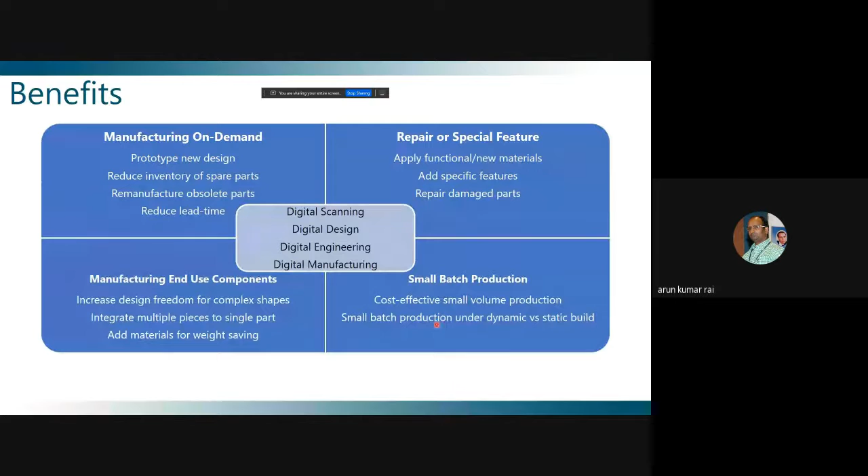Manufacturing end use component means if somebody wants a certain design, can you design it? In conventional manufacturing, it's difficult to do that for a small scale, but here this can be easily done. Similarly, small batch production is easier with additive manufacturing than conventional. So these are basically the benefits of additive manufacturing.

However, it has a lot of challenges still, which I will be telling you later - what are the challenges with additive manufacturing and how it can be rectified and improved upon.

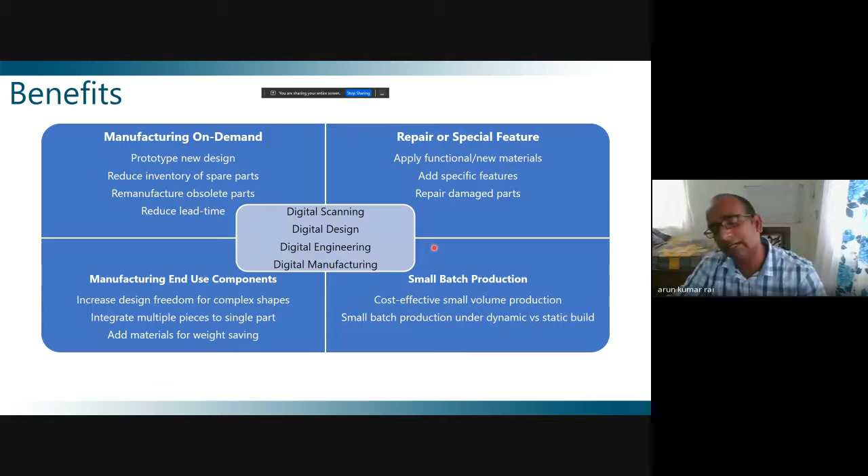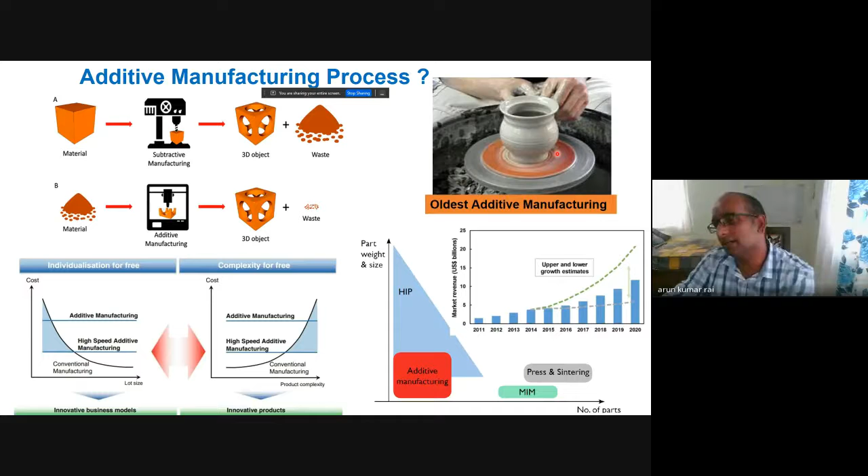Now there are various methods used in additive manufacturing. Going back a minute, here in the corner, you can see this is the oldest additive manufacturing technology used in India, like a pot maker making a pot using clay. This is basically one of the additive manufacturing methods - he made the green body, then sintered it, and then got the final product. So this is what is desired.

Similarly, the next process is called material jetting. In material jetting, instead of using a separate support material, the build material and support material are coaxially fed and then printed, and by using UV light it is cured and made into solid form. This way also you can print the 3D part, but this is again limited to low melting materials like some polymers.

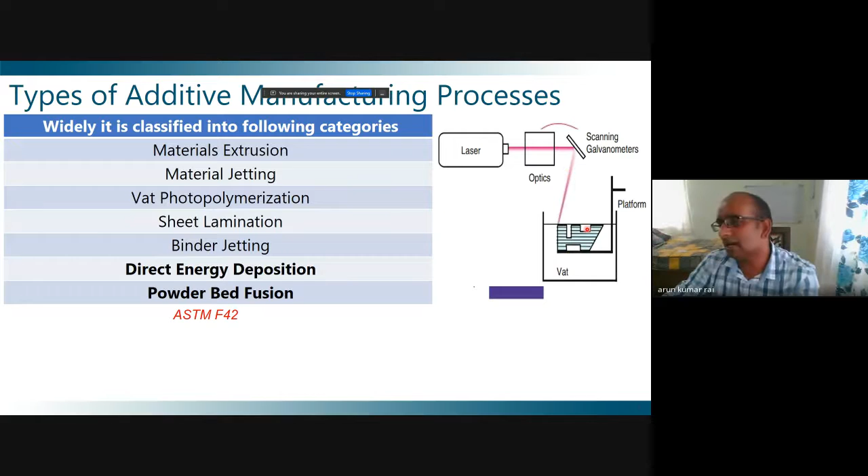Then next is vat photopolymerization. In vat photopolymerization, you have material in liquid form and a laser with a galvo scanner. You just scan whatever desired shape you want to make, and you can print it. But again, this is limited to polymers only.

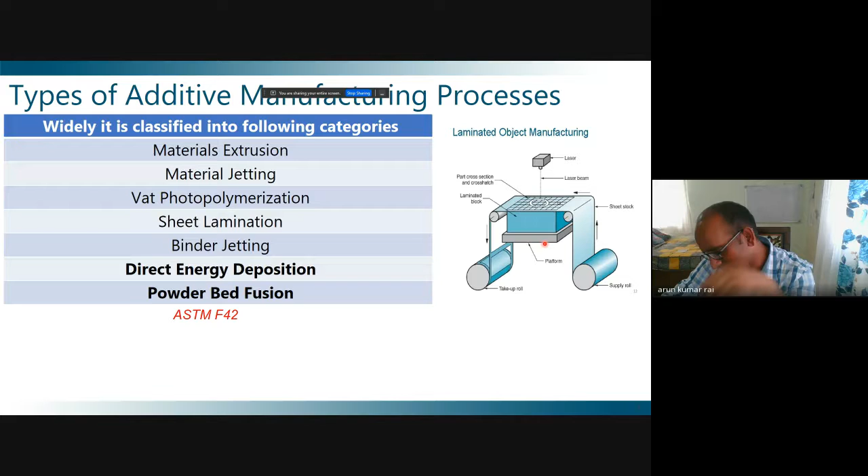That was vat photopolymerization. Now this is the sheet lamination. In sheet lamination, a sheet of polymer is used as the input material, and a laser beam moves over whatever design shape you want, and you can print the desired product, shifting along the z axis to make the 3D part. But again, the issue is that it cannot be used for metals and ceramic materials.

Then next is binder jetting. This binder jetting is actually a very good technique if you want to make ceramic material. What you do is use ceramic powder, overlay it, and use some liquid binder. After adding that, you make a green 3D part, like a clay part. You just use liquid binder to bind it, and then later on you can do sintering and achieve the final product. But what happens in this technique is that when you do the sintering, this binder gets evaporated, and this leads to porosity in the material.

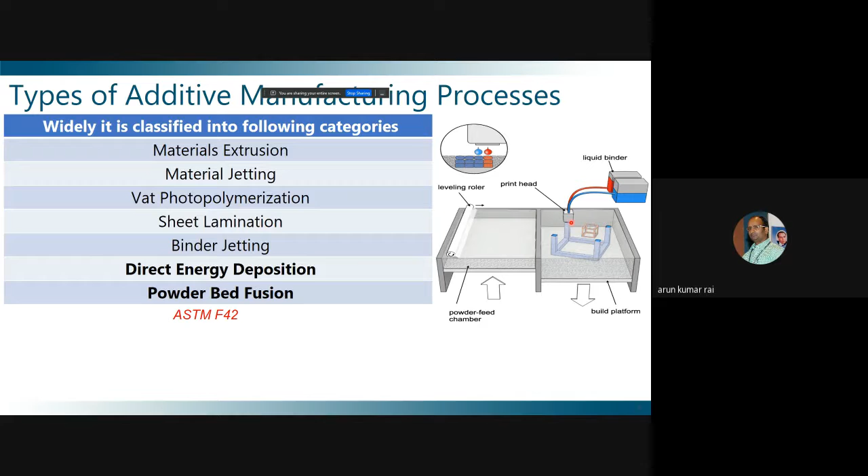If you don't want porosity, then this technique is not good. So if ceramics are involved and a certain amount of porosity is desired, this technique is going to be good. But for metals and all those things, this technique cannot be used.

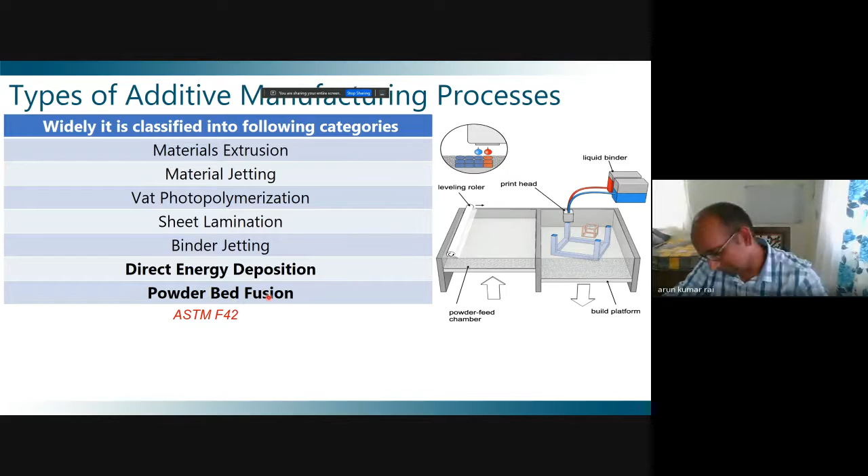Now the next two techniques are direct energy deposition and powder bed fusion. These are the two techniques used especially for printing metallic based material, which is what we use today in several engineering applications. For metallic materials, these two techniques, direct energy deposition and powder bed fusion, are used. In direct energy deposition, I am defining it based on laser - if your source is laser based, electron beam based, or some other based, there are two techniques.

One is the powder bed method. Powder bed means you have a bed over which the powder is sprayed, and then you move the laser as per the design of the product. Whatever desired shape you want to make, you just move the laser. I will come in more detail in the next slide. So this is powder bed fusion technology, or simply called powder bed technology.

Here there are three processes: laser beam melting, electron beam melting, or 3D printing/inkjet printing - that is the green part, similar to what I described in binder jetting, but here it is a little different. So these are the three ways you can do powder bed.

Second is direct energy deposition, or blown powder technology. This blown powder technology means the powder and the laser beam, electron, or whatever heat source, are fed coaxially together onto the substrate. But in powder bed technology, powder is first spread over the substrate and then the laser is moved - powder and laser beam are not coming together.

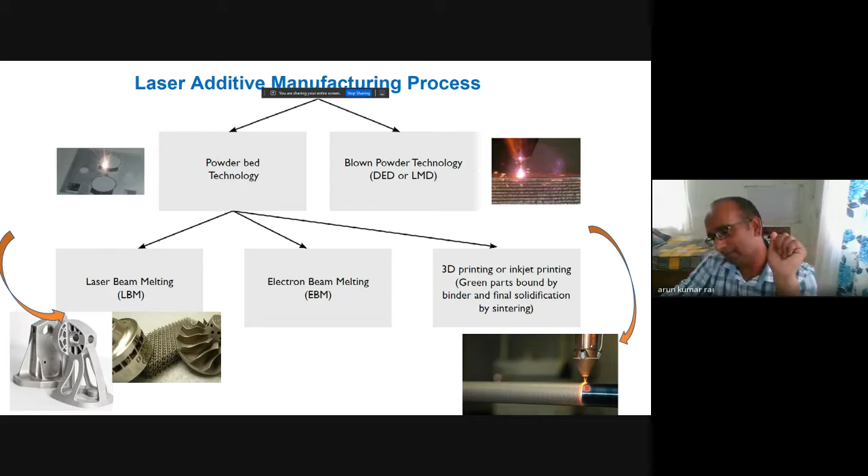The advantage is that in powder bed fusion, you can make a lot of complex shapes - you have a lot of design freedom, as you can see in the corners here. But in direct energy deposition, one important advantage is that if you want to do some cladding or coating of one material on another, like on a tube, you cannot do this in powder bed - you can only do it with direct energy deposition, where powder and laser beam are coaxially fed. So this is one of the most important advantages of direct energy deposition technology.

Again, based on the heat source, as I have already explained, laser powder bed fusion—if you use an electron beam, it is called EBPBF. Then there's laser direct energy deposition, which I discussed earlier. Electron beam direct deposition just depends on your heat source. Both technologies are used by many people, but the frequently used ones are laser powder bed fusion and laser direct energy deposition.

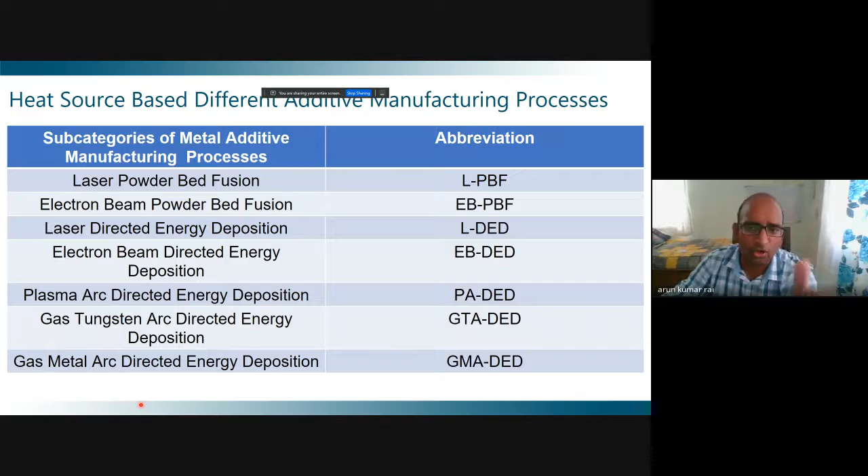If your heat source is plasma, it's called plasma arc directed energy deposition. If the heat source is gas tungsten arc, it is called wire arc DED, used as a hybrid welding technique recently. Next is gas metal arc direct energy deposition. So this is basically classification based on your heat source.

Now henceforth I will be only focusing on laser based deposition, because if I cover other techniques it will take more than 2 hours. So I am only focusing on laser based techniques, that is laser powder bed fusion and laser direct energy deposition.

So this is the first slide, the powder bed fusion method. There is your substrate base over which powder is first sprayed by means of a powder roller, and then the laser beam is moved over that using a galvo scanner. The laser beam is directed, and the galvo scanner moves according to a given program, so you can print the material, then pull down the substrate and spread the material again, and by this you can print 3D products. I will show one video of how it looks.

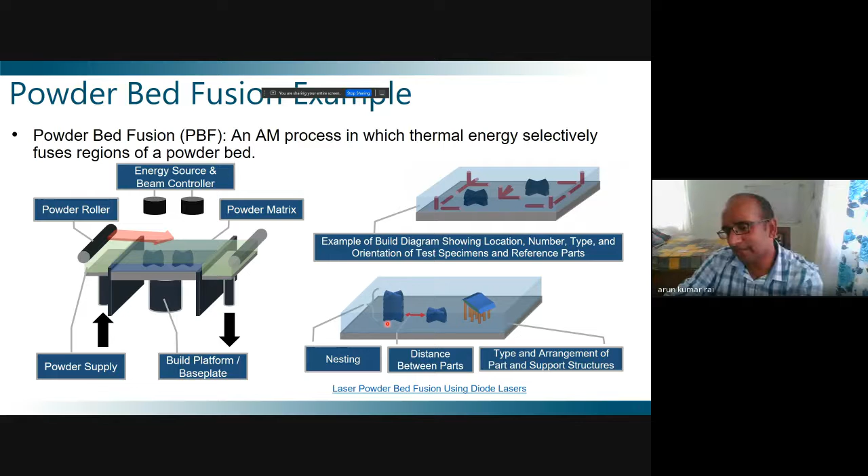You can see this is one of the videos. Sorry, just a minute now. Just a minute, I am not able to run the video. Wait, no? Just let me run the video.

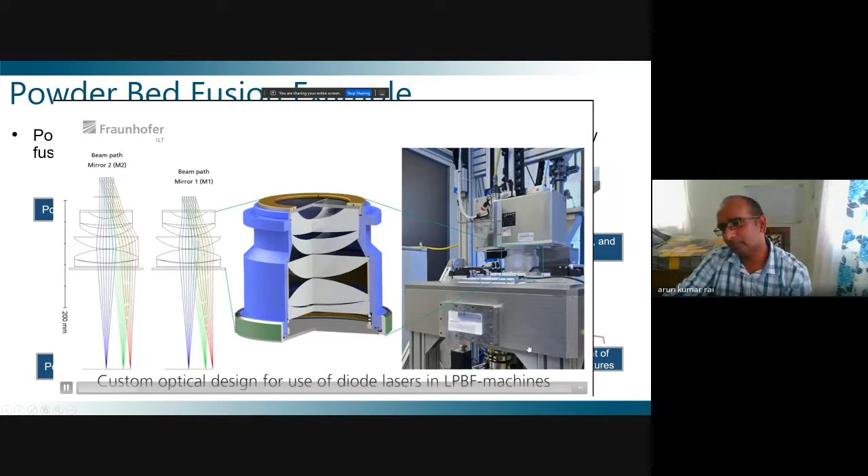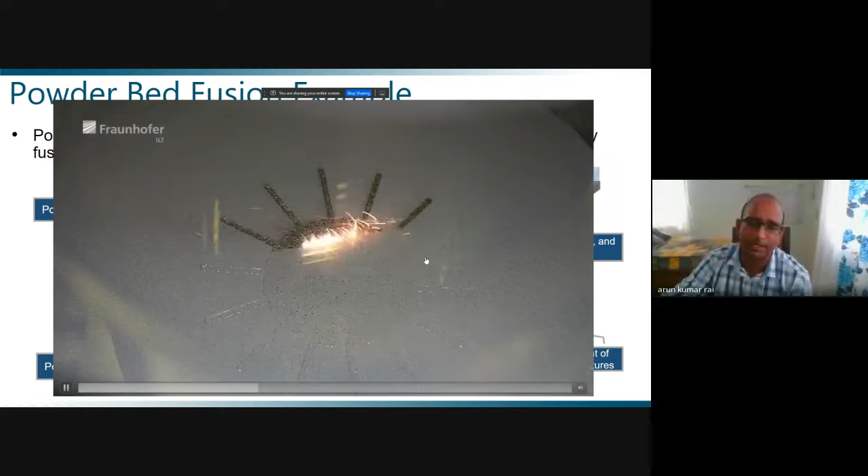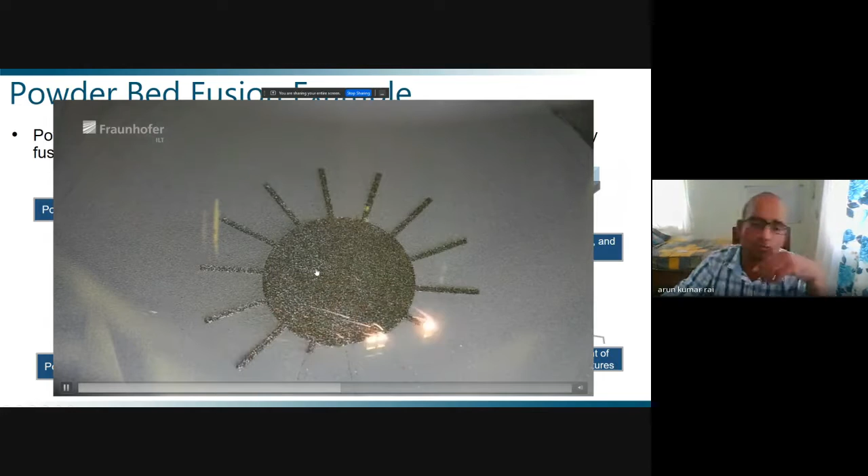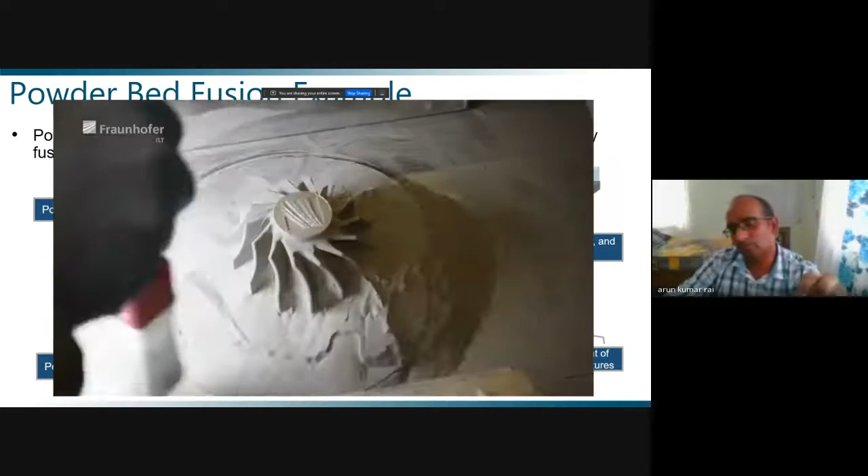This is actually a powder bed fusion technology. This is one printer machine, a powder bed fusion machine by some company. Suppose you want to design a complex shape by powder bed fusion: powder is overlaid over the substrate, and the laser beam moves according to whatever shape you want to design, moving with the help of a galvo scanner. The laser beam is fed through that and moves accordingly. You keep moving in the Z direction, and the final product will look like this. This entire product is printed in one stage, but doing the same thing with a conventional process may take a lot of time.

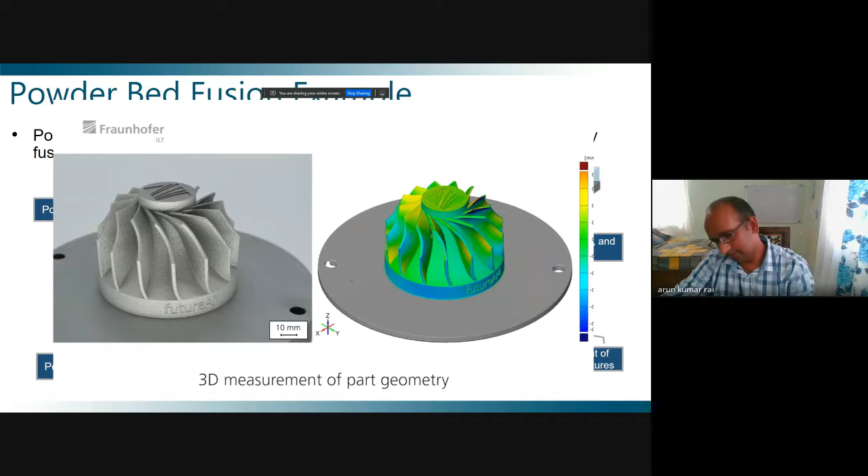Next comes laser direct energy deposition. In laser direct energy deposition, both powder and laser beam are fed coaxially. This is the advantage of this technique: suppose you have a job where the substrate is not a planar substrate, then it will be difficult to print using powder bed technology. But with this method you can, because your powder and laser beam come in parallel onto the substrate.

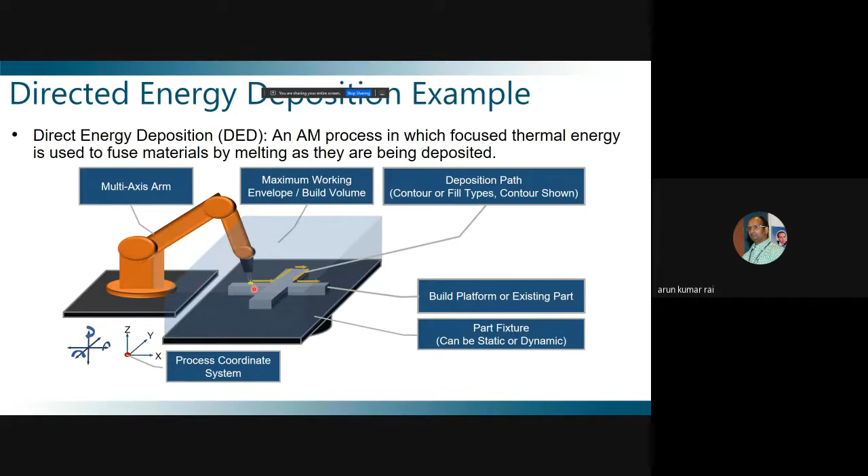This has one more advantage: the thickness you can print in one layer. In powder bed fusion, the maximum thickness you can achieve is 50 to 100 microns. Beyond that, it creates a lot of defects in the material, which I will discuss later—that is a disadvantage of powder bed fusion. But in direct energy deposition, you can print at least 500 to 600 microns thickness at one time, so the throughput is higher in direct energy deposition.

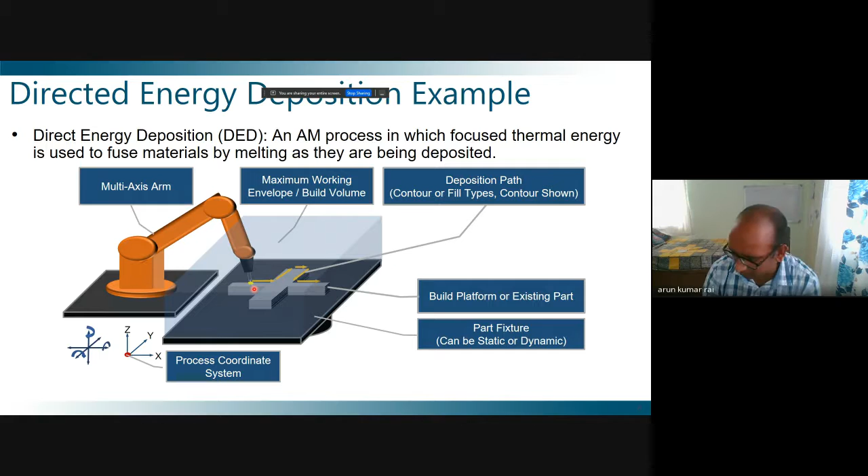But one of the main disadvantages of this technique is that it cannot print as complex shapes as powder bed fusion can. So both have their advantages and disadvantages, and can be used as per requirement. If a technology is not possible with direct energy deposition, we can go for powder bed fusion; otherwise, direct energy deposition can be used. Here also I will show you one video.

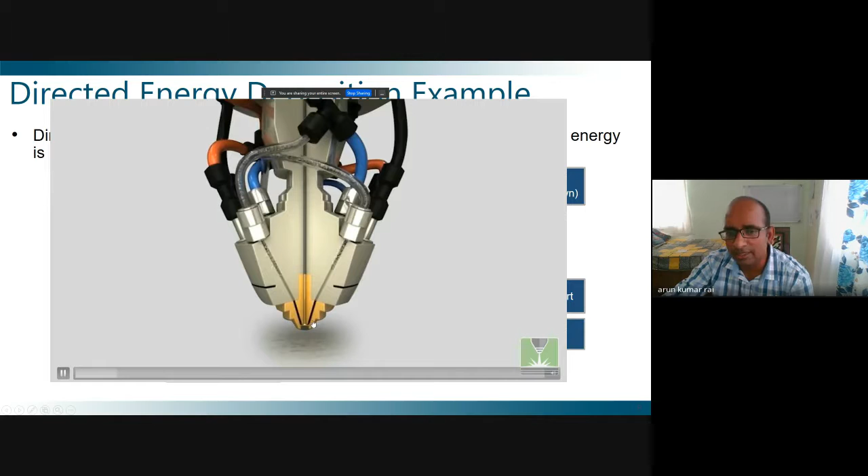You can see here, this is a laser beam, and this is your powder and your protective gas, all coming together on the substrate. Okay, this is your substrate.

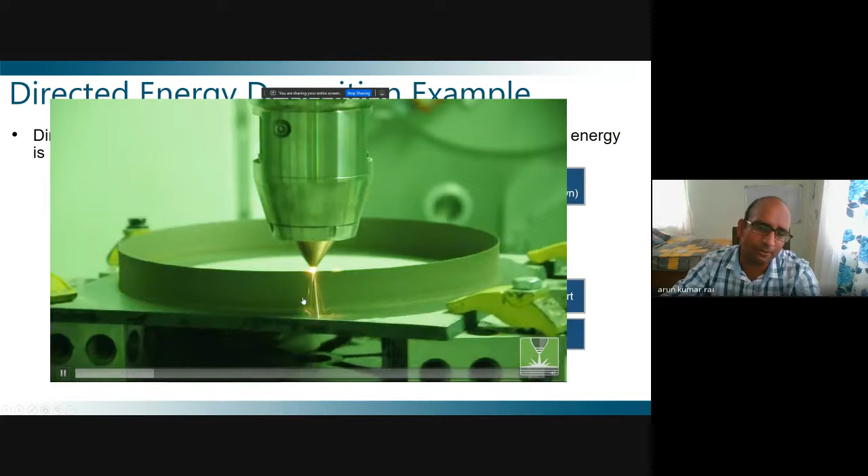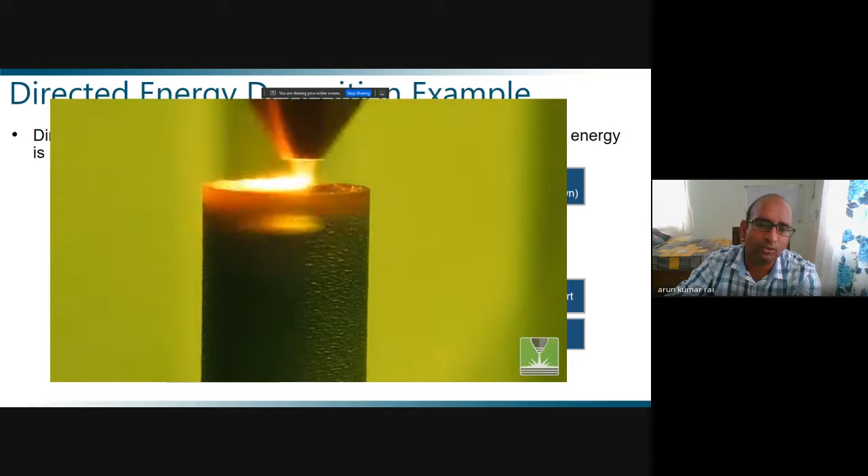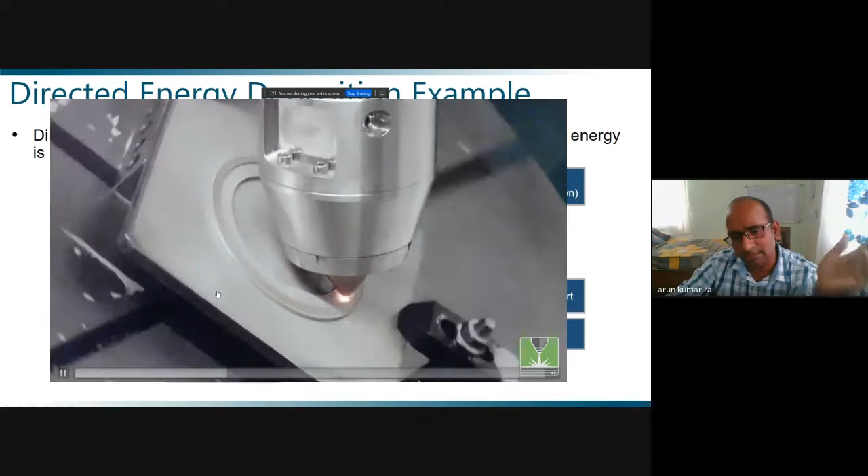You will see this substrate is moved with the help of a CNC stage, which has a 5-axis provision. So it can move X, Y, Z, and theta, phi. Suppose you want some shape, you just tilt the substrate with the help of the CNC stage. So with this you can print whatever desired shape or thing you want to make.

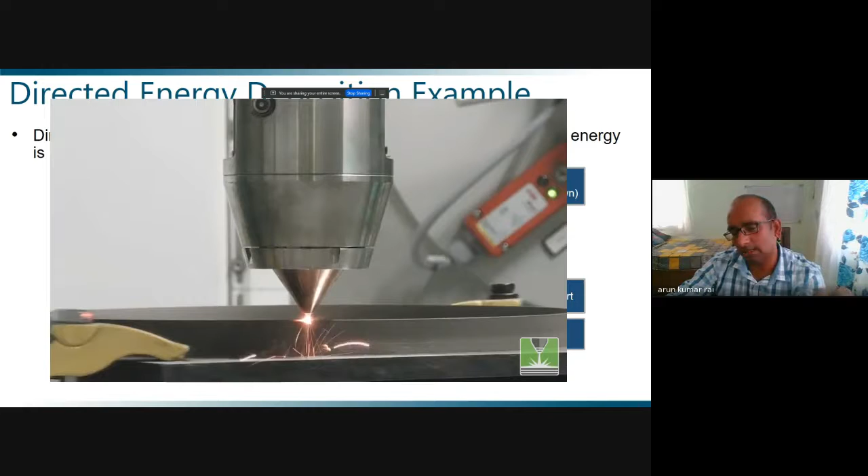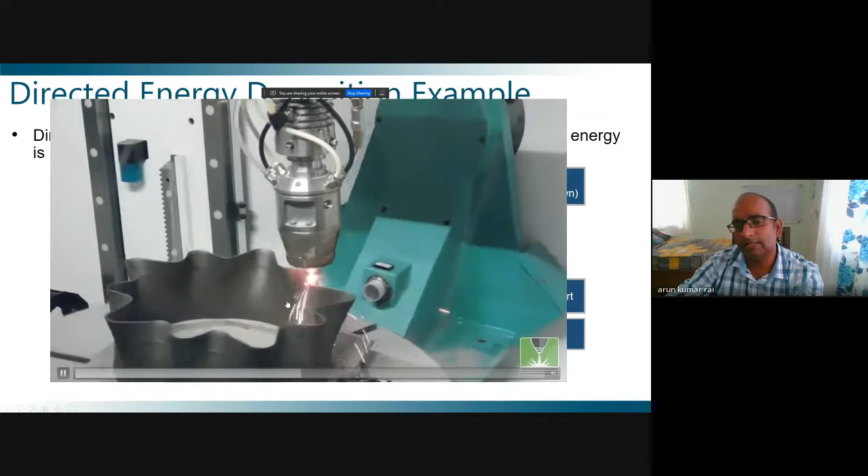Like you can see here, this is a tube being printed with a thin wall. So you will see the geometrical control here. You can see after printing this kind of design, it is possible to do. And even a small repair or some finishing you want to do, you can easily do with this technique.

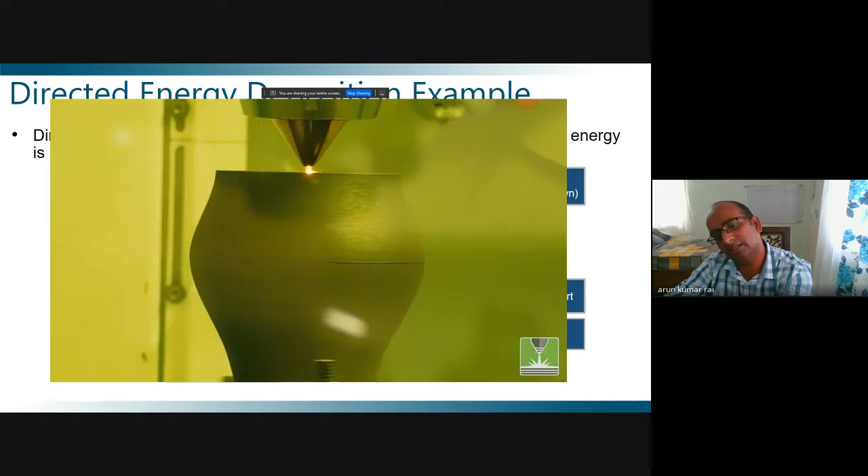You can also see the bending of some part. Suppose some part is there, how the curve has been created with this technique - this is very challenging actually, but now it is possible with direct energy deposition.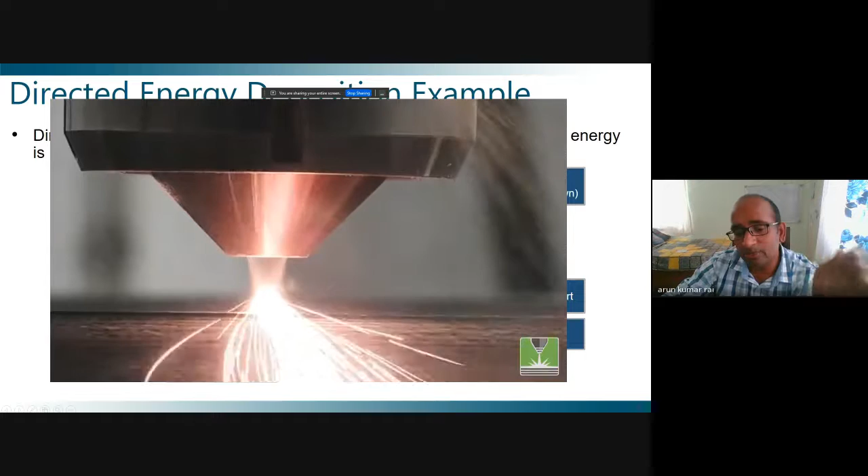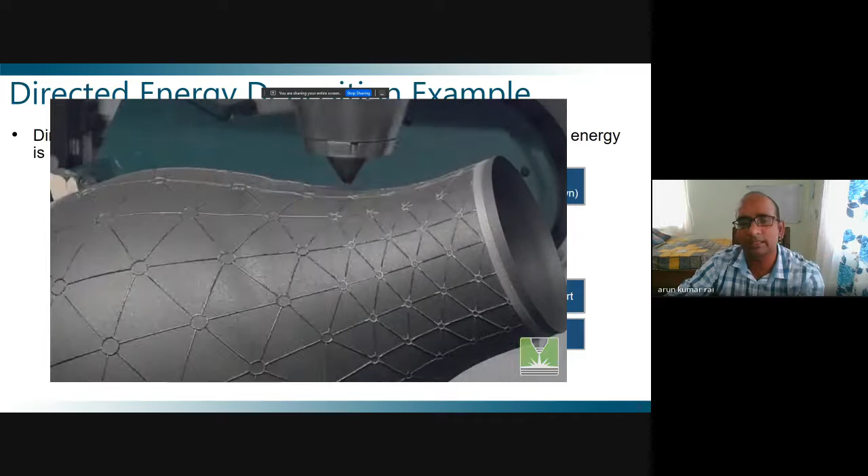Then you can see, over the final product, you can also make some design at a later stage. After the part is done, this design is done using the same technique without distorting your component. So this is the advantage of this technique.

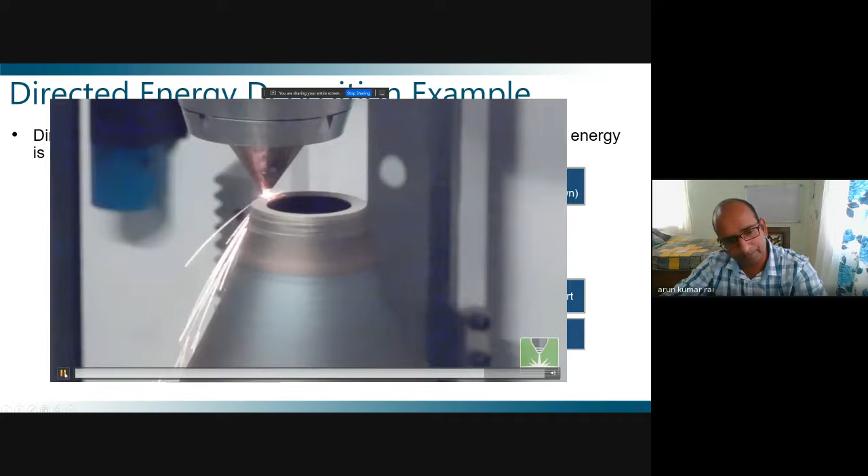Now in directed energy deposition, you will see there are two approaches based on type of feedstock. One is powder based, like what I have been showing you - this is powder based. The other is wire based.

When it is required, suppose you are using electron beam as a source, then you know a vacuum condition is required, and the vacuum is of the order of 10 power minus 8 to minus 9 torr. So there, if you use powder, you cannot maintain the vacuum. So when you go with electron beam as a source, you should go for wire-based feedstock rather than powder-based.

Similarly, heat energy - this is laser type you can use. Here you can use laser, electron beam, plasma, or electric arc for heat energy. The second category is kinetic energy.

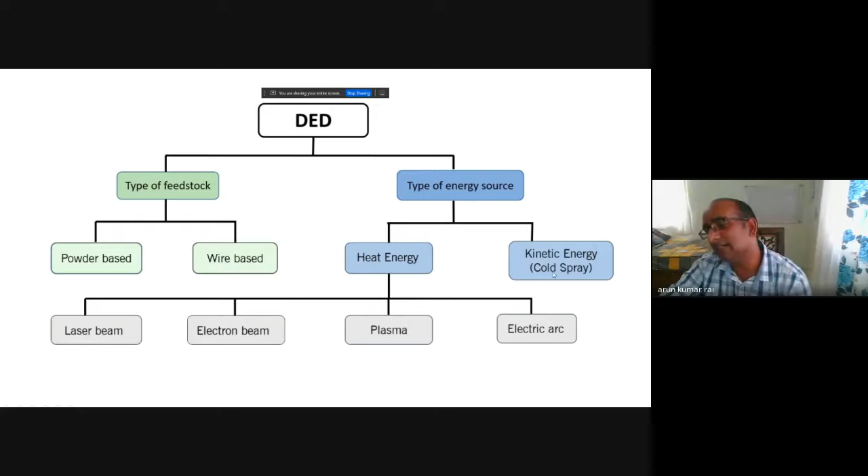Second is kinetic - you just accelerate your powder particles with some velocity. When it goes and is stuck on your substrate, it gets deposited. That is called supersonic based deposition.

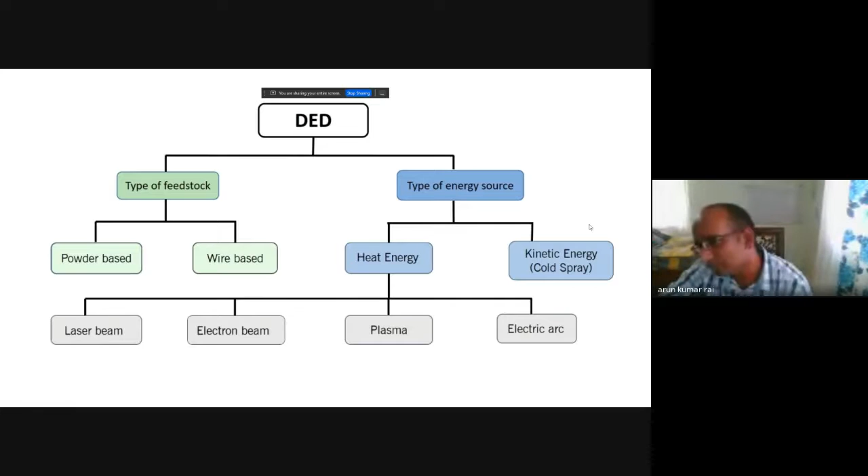This technique is very useful where you don't want melting to happen, because sometimes melting leads to problems like with dissimilar materials. If you want to deposit dissimilar material, formation of unwanted phases will happen if you go the melting route. So normally the melting route is avoided. In that scenario, you can use kinetic energy based techniques like cold spray technology to deposit dissimilar material.

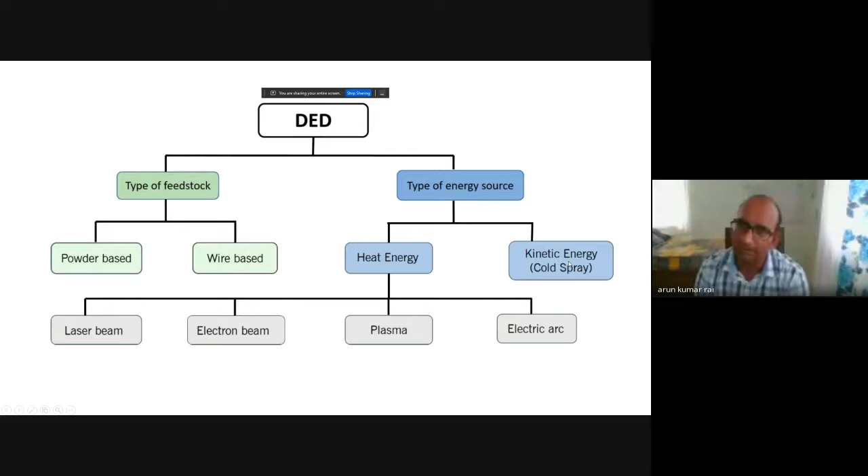So in directed energy deposition, you can have various options. Now I will come to the different steps actually involved during the additive manufacturing process.

During the additive manufacturing process, first comes part design. Suppose some part you want to design, you first have to think about exactly what you want. Here I am giving one example - this part has to be designed or printed.

First we have to create a software for that, meaning you have to create an STL file - that is called .stl. The full form is stereolithography. This was the name when additive manufacturing technology was first developed, that's why this name STL file comes. So first you create an STL file, then you do the physical build up. After creating your STL file, you make slices, layer by layer, since you are going to print this layer by layer, so you have to do slicing.

After slicing, this input is given through a computer to the machine, and the machine will start printing the final product. Once you get the final product, it requires a lot of checking. First is the surface roughness - suppose you have printed a part and it doesn't have the desired surface roughness, then you have to do some machining to remove the unwanted surface roughness.

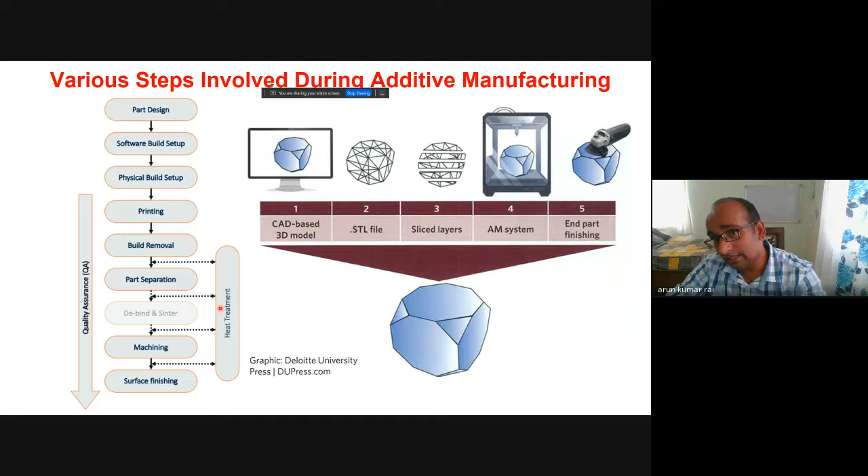It is similar to conventional processes, but here it starts from scratch - meaning everything starts from the powder, then you deposit and qualify each part, and finally test the mechanical property and microstructure. If everything is okay, only then can you qualify the product. So these are the different steps required during the additive manufacturing process of an engineering component.

Now it comes to what parameters in laser additive manufacturing process need to be monitored. You will see there are two things to be monitored - one is the input parameter, second is the output parameter. In the input parameter, first and foremost comes the laser source.

The laser source is very important because the wavelength of the laser decides whether this material can be printed or not, because absorption of a laser beam by a metal is very challenging. This happens because metals are conductors, they have a lot of free electrons, and this laser is an electromagnetic wave.

When it interacts with the electrons, it can repel them out. So material absorption is poor if the material has high thermal conductivity. If you are going to print a high thermal conductivity material like copper and aluminum, the job becomes very challenging to print by laser. So to do that, sometimes they use a different wavelength, like a longer wavelength has more reflection than a shorter wavelength. So if you want to print a high conducting material, it is better to go for a shorter wavelength like green laser.

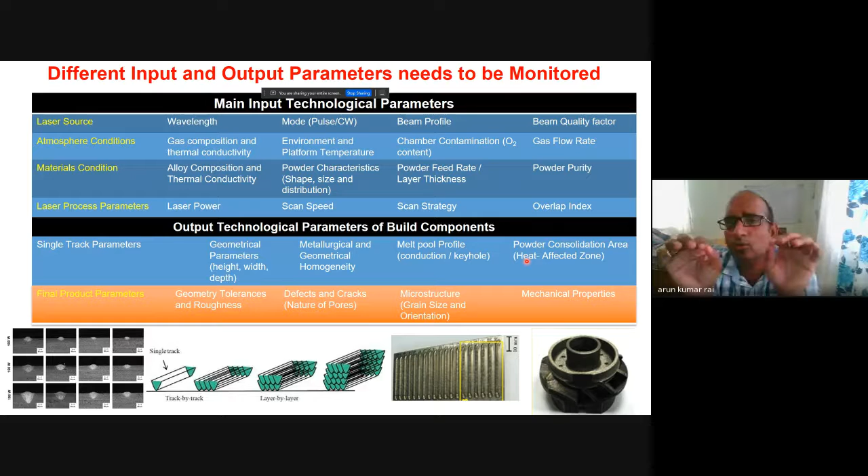Then next is the overlap index. This basically concerns the laser beam - suppose I am using a 3mm spot diameter. How much I should overlap, whether 50%, 60%, 70%, or 90%, is again decided by the material's melt pool profile and several other things. So this also needs to be optimized.

Suppose how we deposit - you can see we first deposit a single layer, then we overlap and deposit another, meaning first single layer and then multi-layer on a single platform. So you can see the overlap of the laser beam here. Sometimes if you are excessively overlapping or under-overlapping, this can lead to defect formation in the metal. So this has to be optimized before printing the final 3D product like this. Let me show you one of the actual examples here.

These single tracks are deposited, and then based on the single track information, we cut this along the cross section and see the melt pool profile. You can see this is the melt pool profile with respect to laser power. If you go from top to bottom, you can see the laser power being increased from 100 watt to 195 watt.

With increasing laser power, the depth of the melt increases. When only a small part of the substrate is melted, this is called conduction mode of melting, and this is keyhole mode. If you go with conduction mode, sometimes your component may get detached, so you should have adequately melted substrate so it can get bonded with that. If you keep increasing too much, keyhole formation can lead to porosity formation in the metal. So neither can we go very high power, nor can we go very low power.

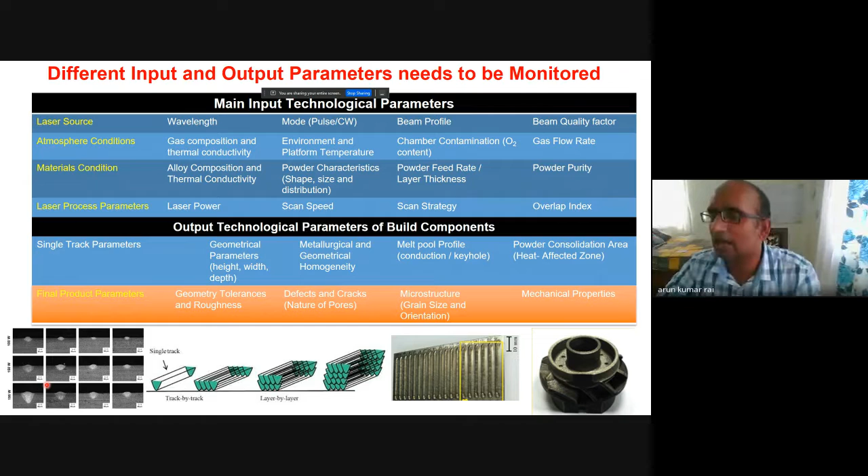Next we look at the metallurgical and geometrical homogeneity. Metallurgical means checking for microstructural issues or defect formation. Then whether the geometry is getting distorted or a proper geometry is formed. Then the melt pool profile, conduction mode and keyhole mode - keyhole mode is not preferred because it leads to porosity formation, and conduction mode with poor wettability is also not preferred because it leads to detachment. All these things have to be looked at before final printing.

Then next is the powder consolidation area, basically the heat affected zone. When you are printing, some of the powder will not melt but will be sintered. That sintered powder area can lead to defect formation.

Then on the final product, what do we look at? Geometry tolerances and roughness - suppose some tolerance is given. So far in additive manufacturing, maximum geometry tolerances are 0.1 mm; if somebody achieves 100 microns, that is a very good job. Then second is defect and crack formation, which has to be optimized, and then microstructure like grain size and orientation also play a very important role in mechanical properties. These things have to be looked at before use in an industrial application.

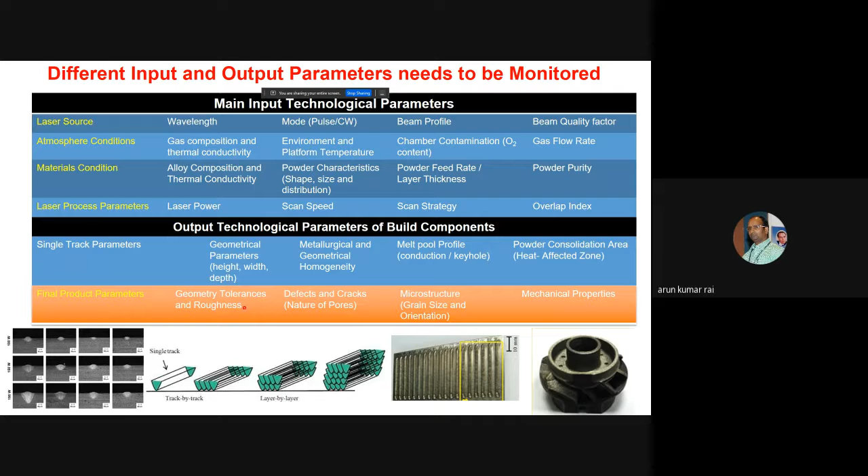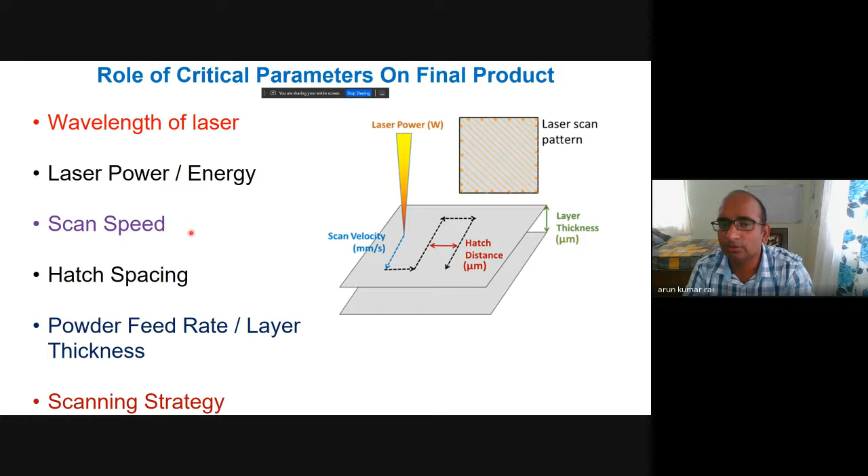So all these parameters one has to look at in detail. Next, whatever I have been telling you, I will now take some of the critical parameters and discuss how they play a role in building a metal component. So first I have already told you about the laser wavelength.

You can see this schematic of a powder bed fusion method. Suppose I have overlaid a powder - what are these terms? Scan velocity is the velocity with which your laser is moving. Then there's laser power, then hatch distance, which is basically the overlap between two laser beams. Then there's laser scan pattern, meaning whether you are scanning like this or scanning linearly. And then powder feed rate or layer thickness. I will discuss one by one how all of these play a role in your final product.

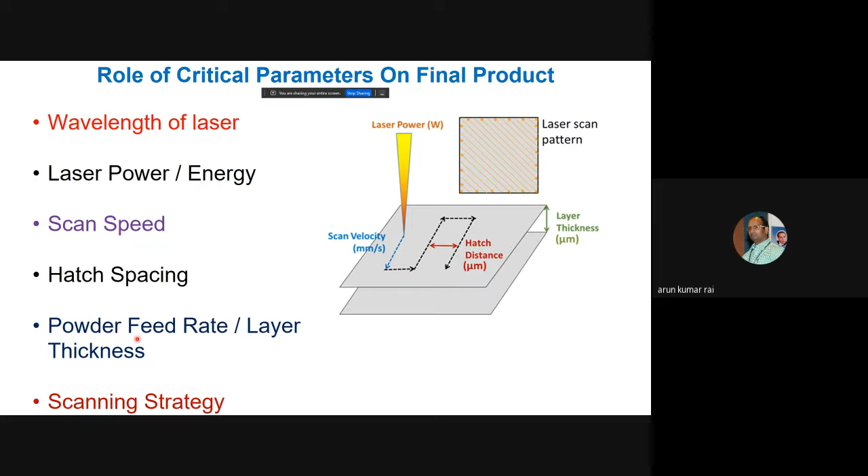Second, even though you take two materials, polycarbonate and copper, look at absorption versus wavelength. Copper is an important material - it has minimum absorption, less than 5%, for 1 micron wavelength. However, at lower wavelengths it has higher absorption, so copper also can only be printed using a lower wavelength material like a green laser.

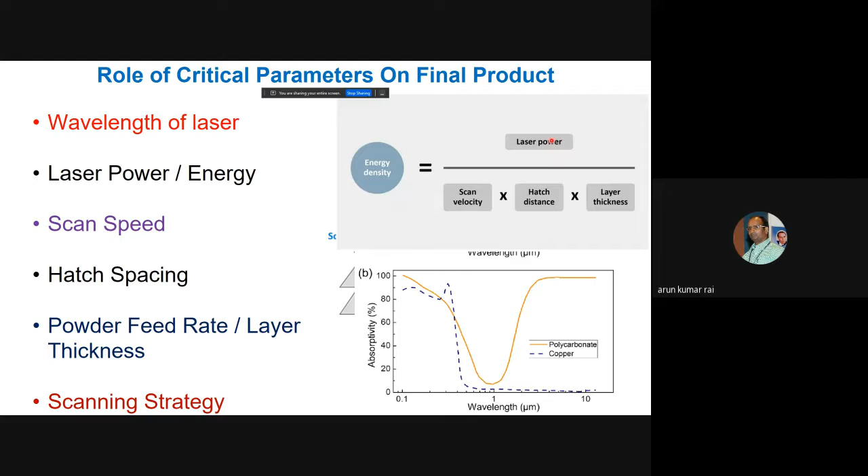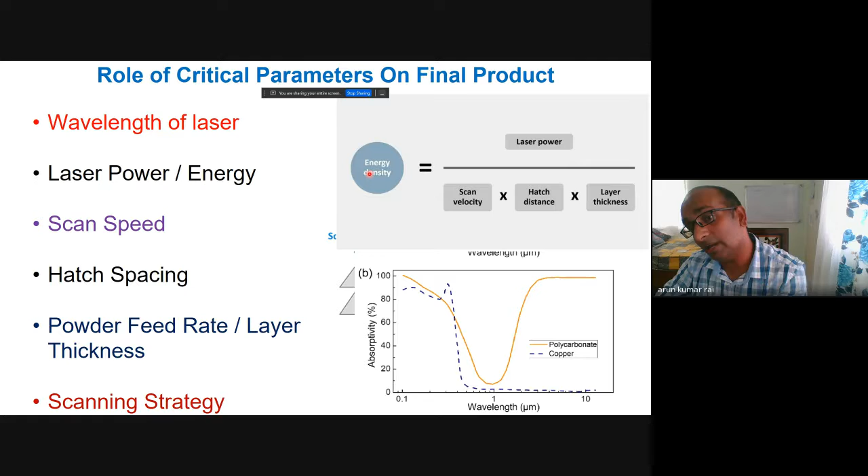Whenever we report to some industry, we report this parameter. Somebody can have different thickness, and accordingly velocity can change, laser power can change, hatch spacing can change, but then different people can report different things. So to avoid this, people look for the energy density - a combined parameter which can be uniquely used for a given material. So we should always give the energy density parameter rather than individual laser power and scan values, because if you alter one of them, the entire thing may stay the same - I can have different combinations that produce the same result. So one has to always look at this.

Now let me come back to how the melt pool profile is affected - the effect of laser power, how laser power and scan velocity play a role on defect formation in the metal. If you use very high laser power but your scan velocity is very low, what happens in that case is you end up with keyhole mode of melting. When keyhole mode of melting happens, the gas - since you are using a protective environment - gets trapped inside.

Okay, inside the material melt pool, this will be left there, and that will lead to formation of pores. So that's why excessive keyhole mode is avoided when you are doing printing. And suppose you have reduced your laser power and increased the scan velocity, that also is not desired.

You can see here, you will see the unmelted powder. Here down, it is not melted at all. Suppose my layer thickness or powder feed rate is high, and scan velocity is high, I am not giving enough time to melt. I am moving the laser very fast, so it is not getting time to melt the entire thing. So you will again have porosity formation. So this porosity formation and that porosity formation actually look different.

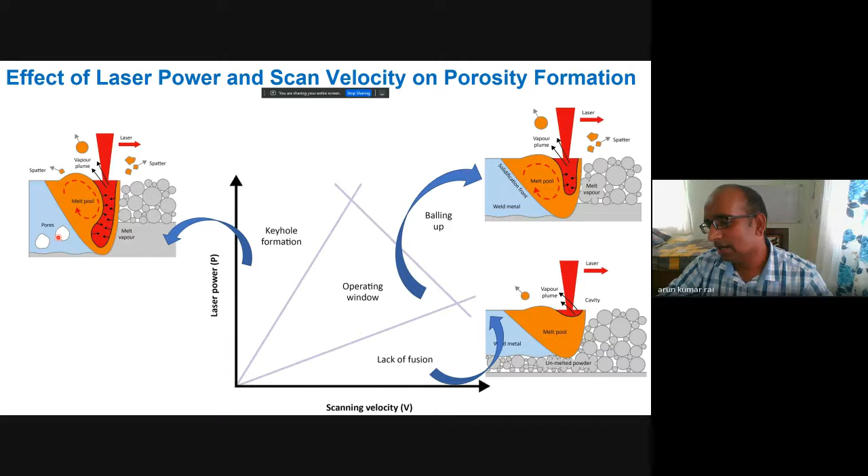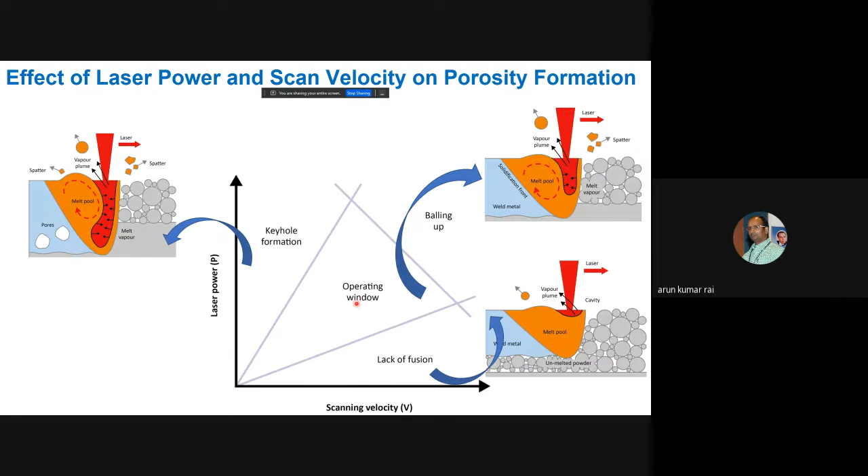I will show you later how you can say that this porosity is due to unmelted powder or due to the keyhole mode. So the desired operating window one has to find out, and this comes somewhere in between, where no porosity formation is observed. So this power and scan velocity combination has to be achieved for printing a material by optimizing the process parameters. That is the most important job to be done in additive manufacturing.

So now I will show you how you can say that the material has keyhole porosity formation or lack of fusion defect. If the pore shape you see in the optical microscope or SEM is spherical in nature, you can simply say this is due to entrapment of gas, and basically high power has been used. So it is a keyhole mode based porosity formation.

If you have some uneven shapes, those kinds of porosities are seen due to non-melting. So either you have used less power or very high scan speed, and that can lead to this kind of defect formation in the material. So just by looking at the microstructure, one can recognize this.

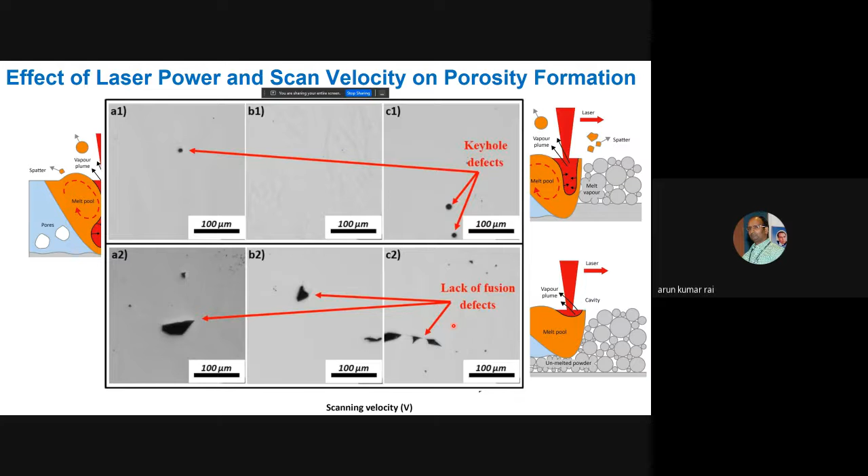And this we have to minimize. Suppose I am printing a material, my porosity should be less than 1%. Only less than 1% is desired. If it is more than that, you cannot proceed, because that can lead to problems later on if it is a very critical component.

Then why does this kind of issue come in keyhole mode? Why does porosity form? There are two governing parameters. One is called Marangoni force. You might have heard of this Marangoni force. In that there are two things: the surface tension of the material. You will see the surface tension of the material with temperature increasing, and when temperature decreases, it is increasing.

So what happens? Suppose this melt pool has formed. Due to the surface tension effect, this melt pool will flow outward. And second is the recoil pressure, which follows a similar trend, maximum here, minimum there. So these two opposite factors work together: recoil pressure works downward, and the Marangoni effect leads the material to flow outside.

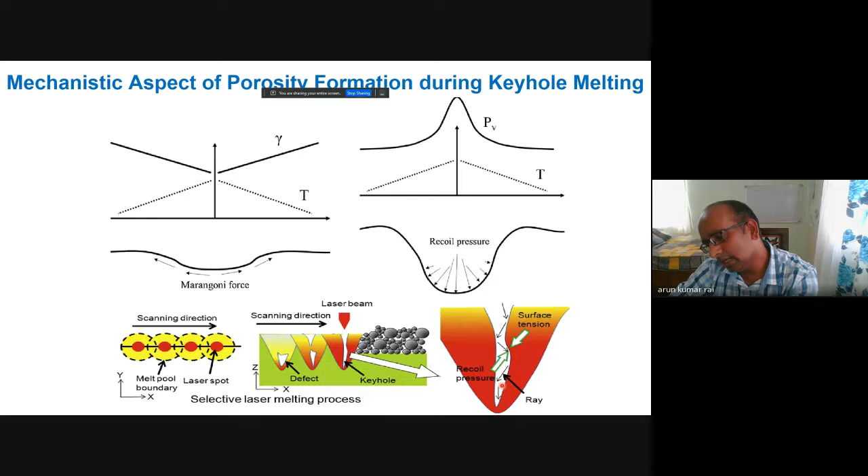So if you have excess melting, that can lead to formation of the keyhole kind of defect, as I showed you. So these are the two parameters which play a role in its formation. What happens when you go deeper and deeper? The material will not be able to fill over here due to the Marangoni effect. The recoil pressure will keep on penetrating down, but due to the Marangoni effect, material will flow outward, and this area will be left vacant if gas is there, leading to formation of pores.

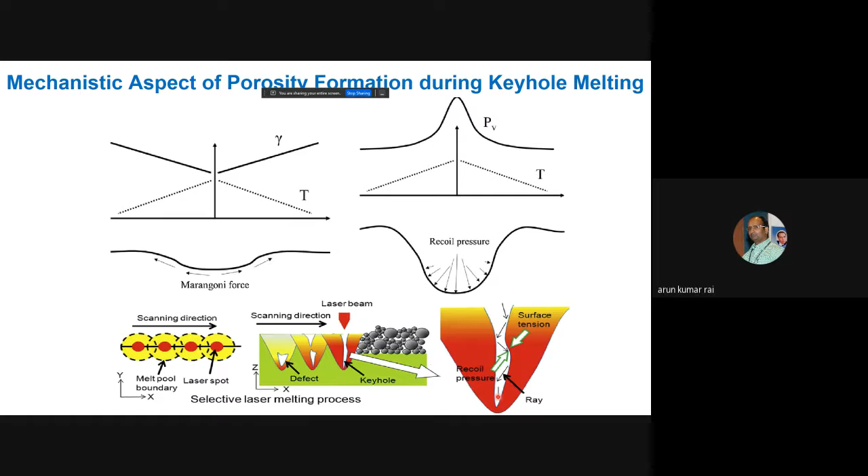Next, let's come to the effect of hatch spacing on your processing window. As I told earlier, this region and that region lead to formation of porosity defects. So here also, if you use very large hatch spacing, you will end up with non-melting of the material. If you use very small hatch spacing, you will also end up with defect formation, because the melt becomes very turbulent with smaller hatch spacing, leading to a dominant effect of the Marangoni flow.

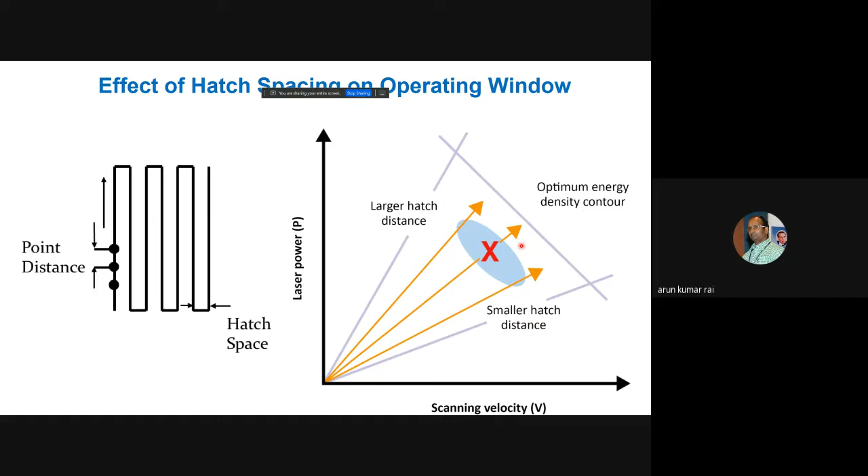That's why it is avoided. For a given laser power and scan velocity, if you change your hatch spacing, your operating window is going to change. You can see here, there are three regions. The operating window will change according to your hatch spacing.

Next comes the thickness, the layer thickness of your material. Suppose you are using powder bed fusion, then how does the thickness of the layer play a role on this operating window? If you have a thinner layer, your operating window can be wider, meaning you have a lot more area for processing. If you have a thicker layer, your operating window will be narrower, meaning you don't have many avenues—the scan velocity and power cannot vary much. So this also plays an important role in defect formation, and you have to get this optimized window for printing the material.

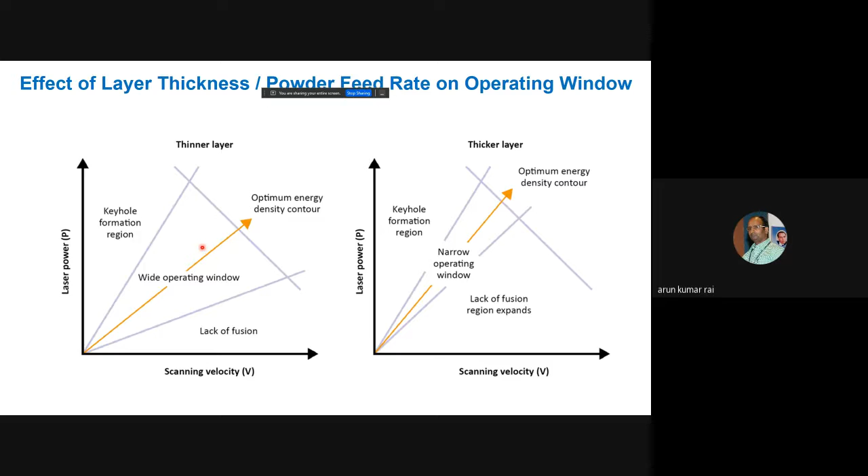Now, suppose you have printed the material. What are the things one has to look at—during the experiment what you have to look at, and after the experiment what one has to look at?

There is a well known triad: process, structure, and property. These three things have to be correlated together to get a desired product. So first we do the experiment. In the experiment, we do in situ phase and stress analysis, then 3D reconstruction of anisotropic microstructure and defects if found, and finally, when printing the material, how the temperature profile, heating and cooling rate decide the final product also has to be looked at.

So this is your process and property, and this is structure, meaning the 3D reconstruction of whatever microstructure you have obtained, and then finally you have to measure the properties. In properties, you measure mechanical properties, and how the mechanical properties are affected by your microstructure, among other things.

Any phase transformation happening—since the laser process is a non-equilibrium process—it is very likely that we end up with non-equilibrium phases which may not be desired for actual operation. So before doing this, one has to simulate using theory and modeling: if I am going to print this material of this alloy, this composition, you have to look at the phase diagram of the material and do the modeling to see whether, for a given cooling rate, the desired microstructure with desired phase will be obtained or not. That prerequisite information we have to get.

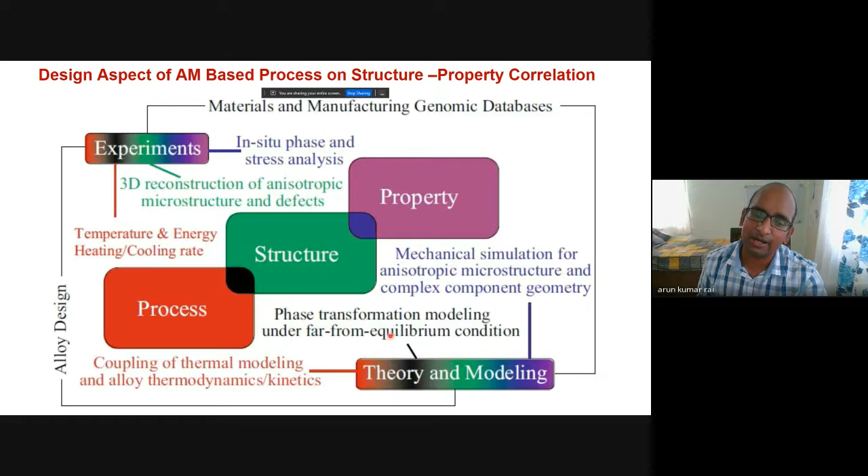So first we have to do this non-equilibrium kinetic analysis and see whether they will form or not. If they are not forming, then what else do you have to do? Suppose you have to do some heat treatment or something—whether with heat treatment you are able to form them or not, that has to be looked at.

In additive manufacturing, one of the important parts is post processing. Among the different steps involved in additive manufacturing, this is the post processing—once you have printed the component, all these things have to be looked at. Before doing this, one has to do modeling and have an idea whether the desired outcome will come or not. And suppose, as per the modeling it is coming, but still during the actual experiment it has not come—then what is the recipe to get that desired property?

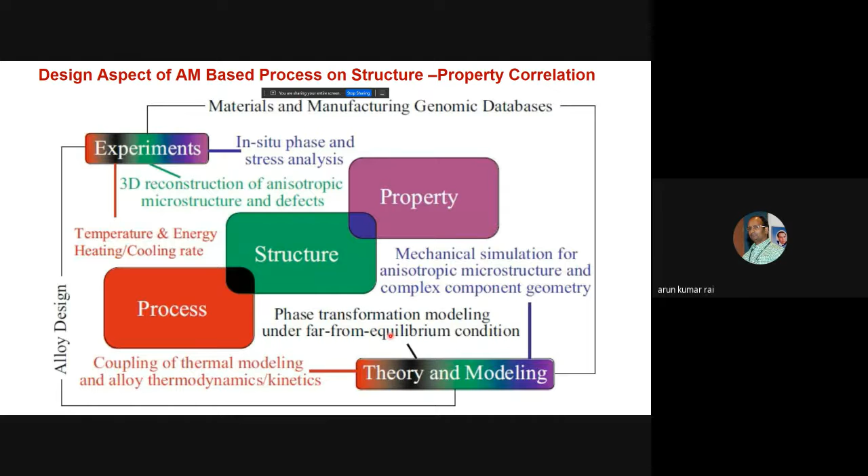So those things have to be looked at properly. Okay, next comes the qualification of a build product. Means if suppose you have printed some component,

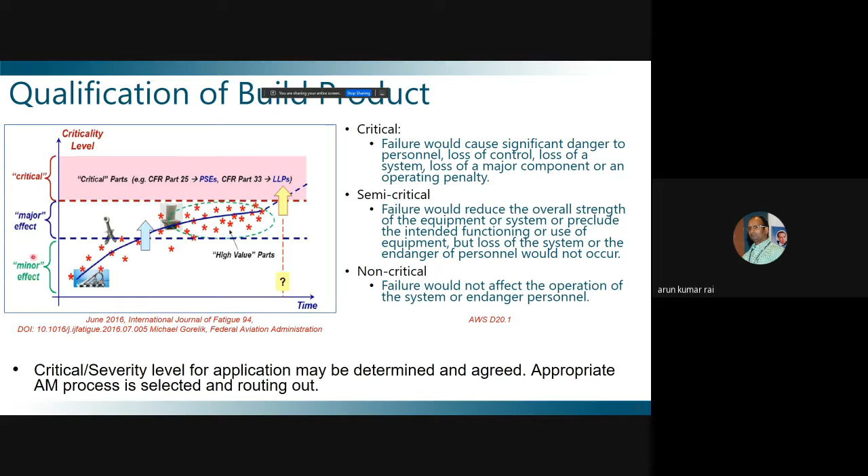how do you qualify it? This qualification actually depends on several things. One is how critical that component is. Suppose the component I have printed is going to be used for some application where the failure of the component does not affect the operation of the system or does not lead to any personal danger, means somebody's life is not in danger due to that component. So those kind of components are non-critical, and for them the stringent criteria of qualification is not very high. So those components can be printed and used easily.

But suppose your level of criticality increases, then this qualification of the material becomes difficult. Like you have a semi-critical case where the failure would reduce overall strength of the equipment or system, but loss of the system or danger to the person would not occur. This is called semi-critical, and a certain amount of qualification has to be done.

And next comes critical. Suppose the failure can lead to loss of property as well as loss of human life, then this becomes very critical, and there the component printed by additive manufacturing has to be critically assessed, what I have already discussed in the previous slides. Okay, so then only we can say this component can be used.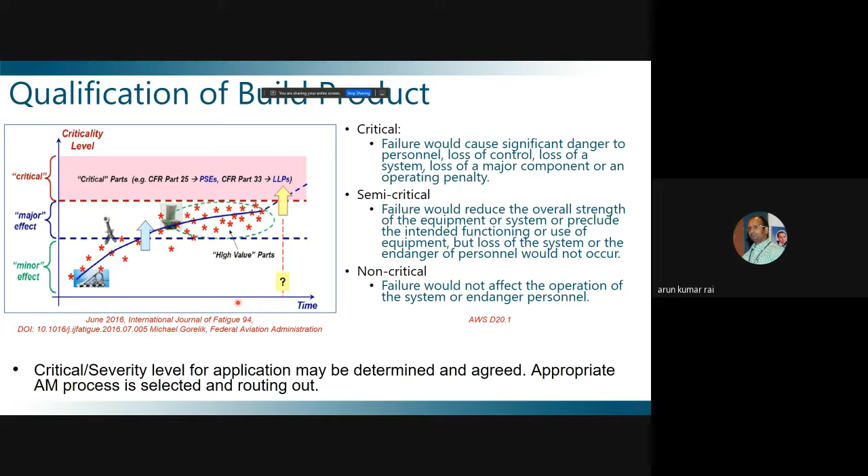So this qualification of a component depends on the nature of criticality, means how critical your component is and where it is going to be used. So that input feedback has to be given by the user to the printer personnel: sir, this is what I need and this is my requirement. If it doesn't meet this, the component cannot be used. So the engineer who is going to build a component has to look at all the aspects and show the proof in terms of characterization and several other things, then only that material can be used.

Okay. So finally, I have discussed so many things, means how different parameters are going to play a role on the product quality in terms of porosity, composition change, residual stress, and how these things can be managed by changing the process parameters.

Here I have given one recipe based on experience: suppose the problem encountered is keyhole porosity, what is our primary approach? First, simply reduce the power. I have told you that when you have high power, the melt pool will be deeper, and when it is deeper, due to the Marangoni effect and recoil pressure, the gas gets trapped inside. So the simple concept is just reduce the power.

If that is not working, the second approach is to keep the power the same and increase the laser velocity, or do remelting or reheating. This is a secondary approach to minimize keyhole porosity. This is experience-based, process-based experience people have developed for any metal processing using laser.

Secondly, if lack of fusion porosity has come, what is the first strategy to reduce it? First is to reduce the line spacing. Means, if the overlap of the two laser beams is very less, suppose 20% or 30% overlap you are doing, means 60-80% of the area is unmelted. That's why you are getting unmelted porosity. So what you do is reduce the line spacing between the two, then your porosity can be reduced.

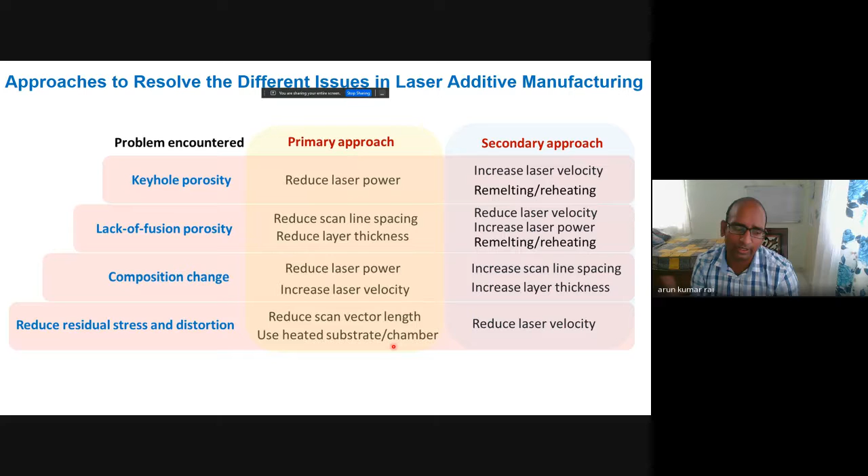I will come back to this - there is some checkerboard scanning pattern, and I will tell you how this helps. Or you use a heated substrate - when you heat your substrate, this residual stress can also be minimized because the temperature difference is going to be less. The secondary approach is to reduce the laser velocity.

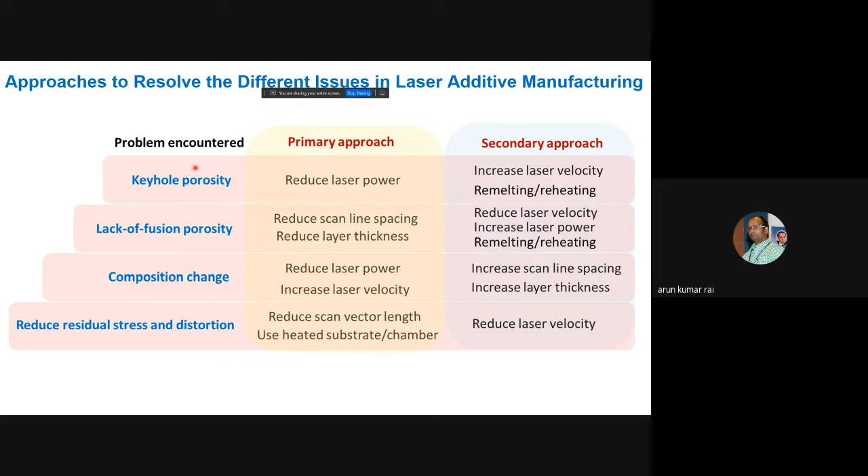So these are the approaches that actually have to be looked at during additive manufacturing to minimize the different problems which we encounter normally. Now I will touch a little bit upon - I don't know how much metallurgy you are aware of.

Maybe most of you are mechanical engineers, but still I will try to tell you how the microstructure is going to be different in additive manufacturing than conventional processes, and how this microstructure is going to play a very important role in your final product component. This is one of the important parameters one has to look at during additive manufacturing. I will explain how different kinds of microstructure develop during the additive manufacturing process, how they are different from conventional, how they can be detrimental, and what we can do to get the desired microstructure.

So during solidification, suppose my liquid is there and it is solidifying - this is the first curve you will see. This is, suppose, my melting temperature of the material. So the liquid side will always have a temperature higher than the melting temperature. That's why it is in liquid form.

When a material forms solid, its temperature will always be less than the melting temperature, so heat conduction generally happens from the solid side. But this only happens when you cool the material very slowly—very, very slowly. When cooling is slow, you get a planar interface between liquid and solid.

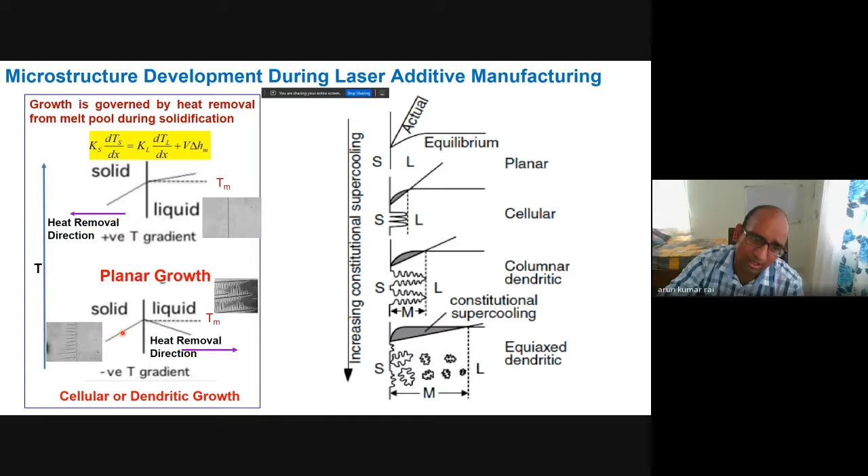In that scenario, the liquid sees less temperature than the solid. So what happens is that heat removal starts happening from the liquid side, and under that condition, a straight interface will not form. Instead, protrusions start forming in the liquid metal, and they remain stable, continuing to grow to form the solid. This kind of cooling leads to formation of a dendritic structure, or dendrites.

These are dendrites, or columnar dendrites—many different structures can form, and this happens because of the cooling rate. Here I have schematically shown how this happens.

When the actual temperature is much higher than the equilibrium temperature in the liquid phase, you end up with a planar interface. But if the liquid temperature is less than the melting temperature, in that region you can get protrusion formation—this is cellular structure formation.

If you're interested in metallurgy, this kind of thing is reported—cellular structure has been observed in laser printed material.

If cooling is still faster, you will see columnar dendrites—columns form, then arms start forming on them. This arm formation is basically due to anisotropy of the liquid crystal, so growth happens only along certain directions, called the easy growth direction. This columnar dendritic structure appears along one line only.

And if it is still faster than that, you see formation of different dendrites that are randomly oriented—these are called equiaxed dendrites. So all this microstructure formation depends on the cooling rate; if the cooling rate is very fast, you get this kind of structure.

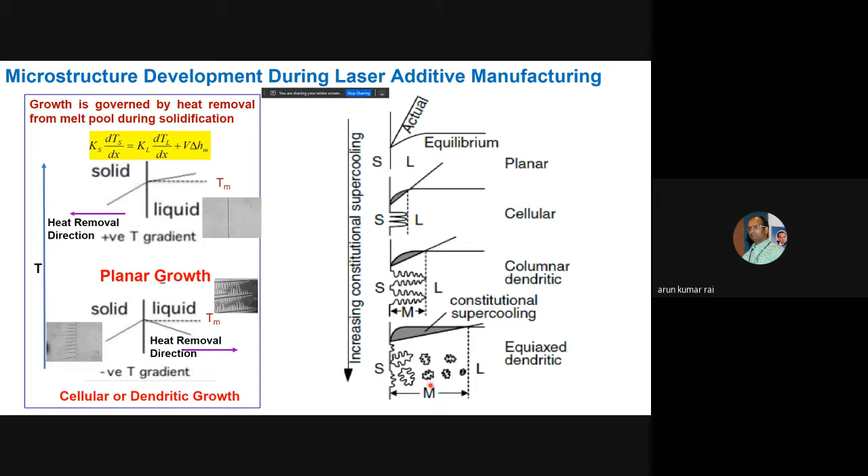In fact, in a single laser beam profile, you can observe all three structures together: near the substrate you see one structure, a little away from the substrate you see another, and much away from the substrate you see yet another. This all depends on the temperature gradient and growth velocity of the liquid.

Now let's look at how temperature gradient and growth velocity play a role in the final product. Unlike conventional processes, laser additive manufacturing leads to formation of a very complex structure, which depends on the temperature gradient and growth rate.

If your temperature gradient is very high and growth rate is very low, you get planar interface formation. If your temperature gradient is low and growth rate is very fast, you get equiaxed dendrite formation, with other structures forming in between.

Second comes the G into R—meaning the temperature gradient multiplied by growth rate—which is basically nothing but the cooling rate. If this cooling rate is smaller, you get a coarse structure, and if larger, you get a fine structure.

Fine structure formation happens when the temperature gradient is very high and growth velocity is less. This criteria holds only when G by R is less than T liquidus minus T solidus divided by the diffusion coefficient of the material, where T liquid means liquidus temperature and T solid means solidus temperature. The slope of this curve is delta T by D L.

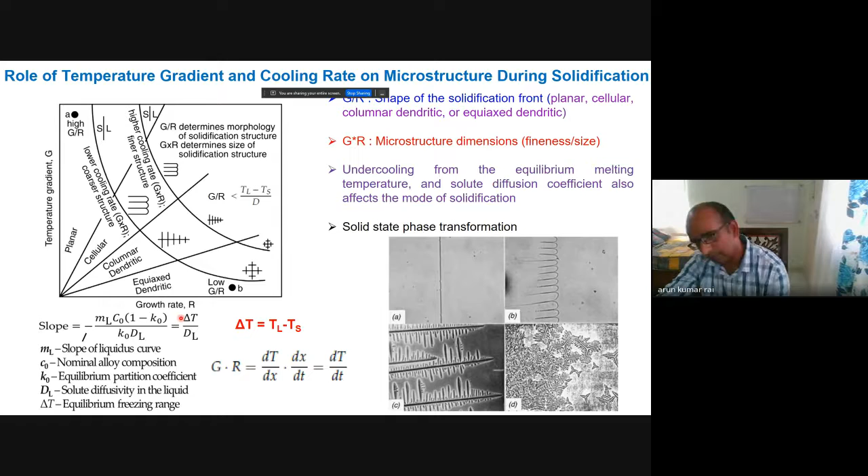Now how does this come in laser processing? This is my laser beam, suppose this is a substrate, I have melted it. You will see just near the substrate a planar interface, this is called the fusion line, here the melting first starts. Now it will start solidifying, so just near the interface you will have epitaxial growth.

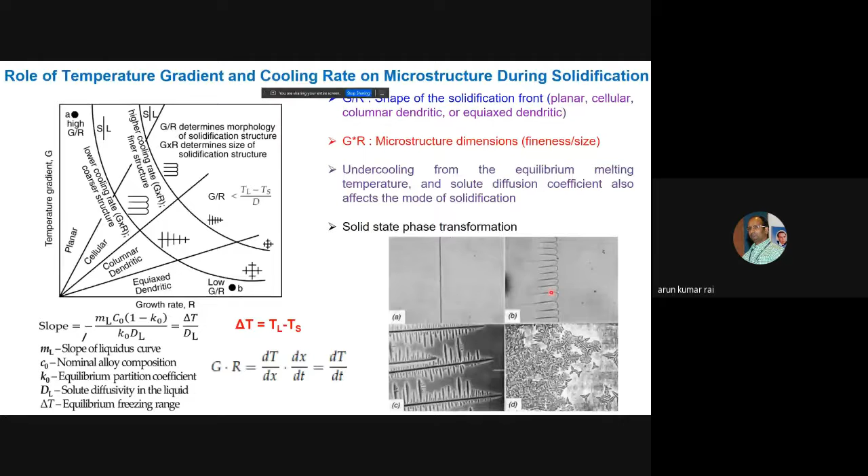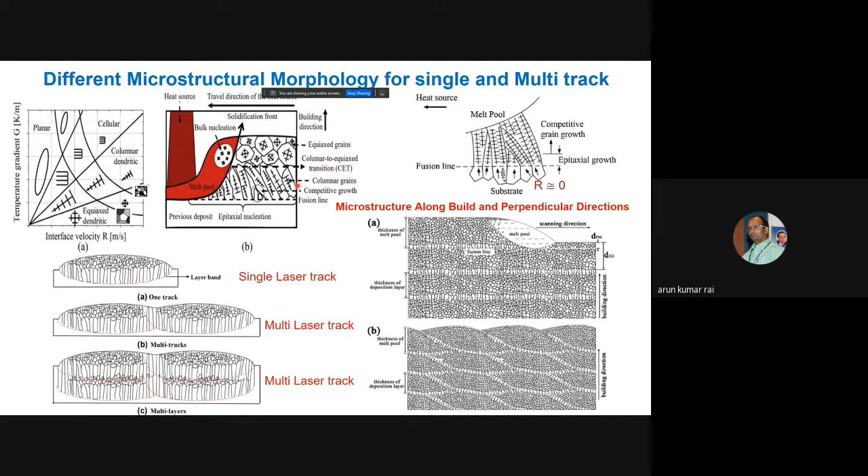This is called epitaxial growth. After epitaxial growth, you will see columnar dendrite formation, and then finally you will have equiaxed dendrite formation. Between equiaxed dendrite formation and epitaxial growth, there is competition, columnar dendrite to equiaxed dendrite formation. This transition is called the columnar to equiaxed transition.

So you will see different microstructure formation even in a single laser beam, meaning in a single laser melt pool you will see all kinds of microstructure. I will show you this in more detail later on to have a better visualization.

You can see this is one example. First layer, as I am depositing, first laser beam I have moved. If you cut the cross section, you will see just near the substrate this columnar growth, this is called epitaxial growth, and next you have equiaxed dendrite like this. When you are overlapping this laser beam, the overlapped region again has columnar growth.

When you deposit the second layer, again you can see this, between two laser beam overlaps and between two layer overlaps. So the entire region has different microstructure than this. You can see how microstructural inhomogeneity is going to develop in a single component deposited.

Here you can see a multi-layer deposited material, along the build direction and perpendicular to build direction. Along the build direction you will see this kind of microstructure, perpendicular to build direction you will see this kind of microstructure. So you see how different microstructures are formed. But if you see a conventionally processed material, this kind of microstructure inhomogeneity is not formed.

If this kind of inhomogeneous microstructure is there, it is going to lead to a problem in your mechanical strength. If the component is very critical and the requirement is very critical, then this kind of microstructure is not required, and this has to be minimized either by post-processing treatment or by optimizing certain process parameters.

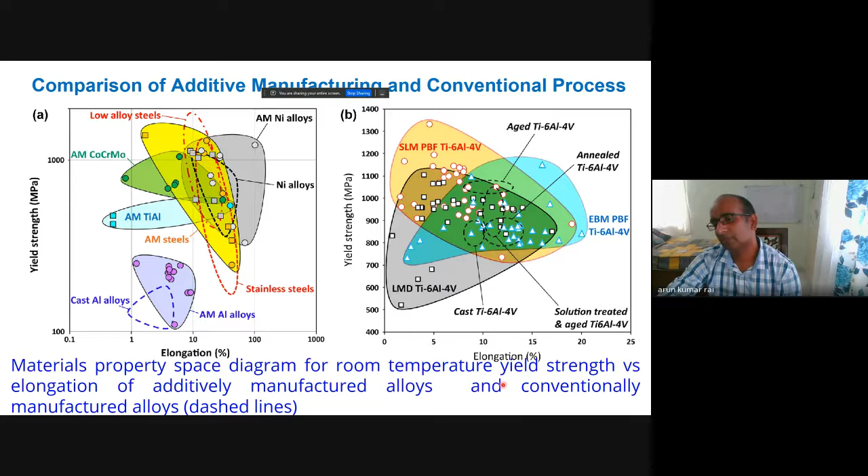Second thing you can see here is the same pattern. This is titanium 6 aluminum 4, an aerospace material. You can see the cast structure has design properties - elongation this much and strength this much - but additive manufacturing has covered a wide range. It can achieve this ductility also, and even in the cast alloy solution treated and aged, they are limited to this. So additive manufacturing is covering the entire range by optimizing certain processes.

This is your laser metal deposition, and this is your direct energy deposition. This is your selective laser powder bed fusion. Powder bed fusion has even much better area, covering much better elongation and strength than direct energy deposition, and this is one of the important specialized processes. So in future, additive manufacturing is really going to replace the conventional process.

So with this, I will stop. Thank you very much.